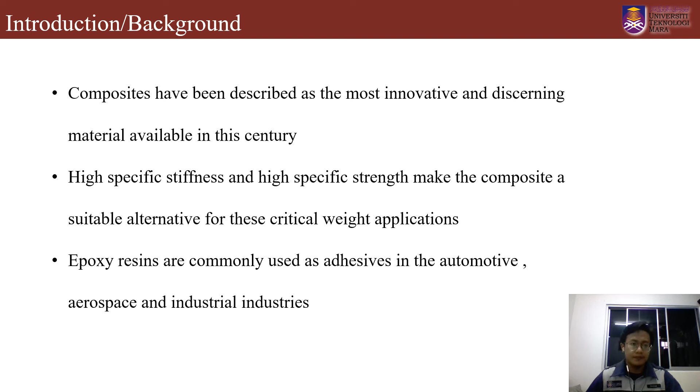There are several problems in doing this experiment. Epoxy composites absorb water, which affects the physical and mechanical properties. It is generally reported that mechanical properties of composite material are influenced by material aging, which is often accompanied by moisture absorption. This can cause delamination and invisible harm. For example, when any object unluckily drops on the composite material, it does not cause visible damage but can change the performance of the composite material.

Composite material is readily exposed to damp environment. The absorption of water in the composite will have an effect on the mechanical properties of the composite and will also reduce the performance of the composite. The composite will be soaked in distilled water for different periods of time and the amount of liquid absorption will be evaluated. The amount of absorption will determine the effect on the performance of the composite.

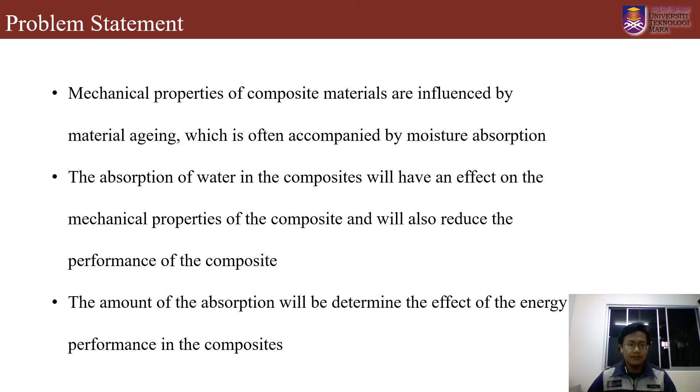There are several objectives in doing this experiment. The first objective is to fabricate composite with moisture content subject to 1 day, 10 days, and 40 days of submersion. The second one is to determine the mechanical properties of glass epoxy composite by using dynamic mechanical analysis (DMA). The third one is to determine the shear strength of glass epoxy composite by using the interlaminar shear strength test. And the final one is to determine the flexural strength of the glass epoxy composite by using the bending test.

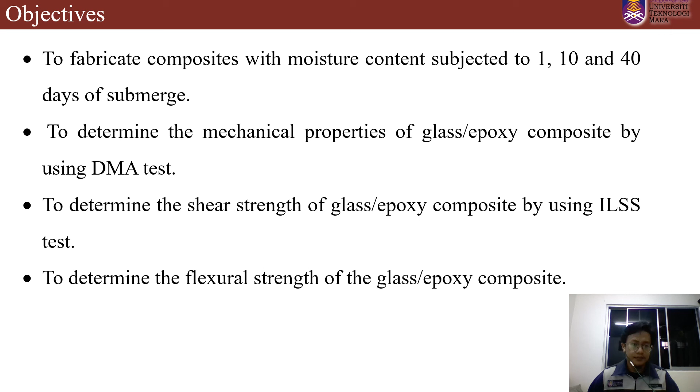For the literature review, we need to find journals about the title that we chose and do some research on it to ensure that we understand the title given. The first one that I found in my research is composite material. The formation of two or more materials with significantly different physical or chemical properties, when combined, produces a material with different characteristics compared to the basic elements.

Composite materials are widely used for bridges, houses, and structures such as ship hulls, race car frames, toilets, storage tanks, marble sinks, and countertops. The greatest disadvantage of composite material for manufacturers of components and aircraft is their higher initial cost compared to metals. The higher cost is mainly due to the quality of the fibers and the complex process needed to produce the finished material. A wonderful material with a lightweight, high strength to weight ratio and stiffness properties has gone a long way to replace traditional materials such as metal, glass, and plastic.

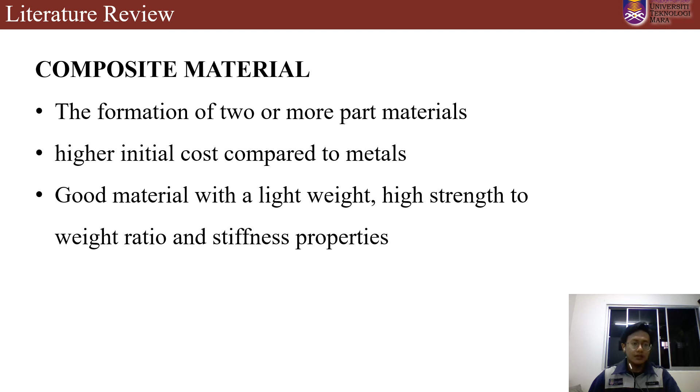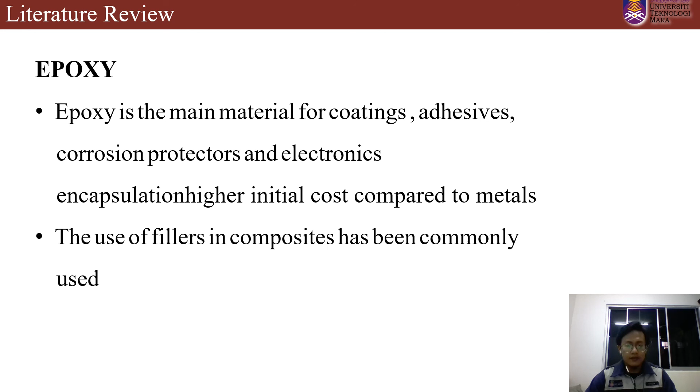The next one is about epoxy. What is epoxy? Epoxy is the main material for coatings, adhesives, corrosion protectors, and electronic encapsulation. Epoxy-based coatings in automotive applications prevent rust and corrosion on vehicle and metal components. Recently, the use of fillers in composites has become common, as certain forms of fillers improve composite properties compared to inorganic fillers such as carbon black and titanium dioxide. Natural fillers have the advantage of lower weight and lower price.

What are we going to do for the composite in this experiment? We need to soak the composite specimen in distilled water. So, in my research, I found the influence of moisture content on composites. Composite materials are always exposed to moist and wet environments during their service life. It is important to study the effect of moisture on composite material. Moisture absorption test is a suitable test to investigate the effect of the moisture on the composite.

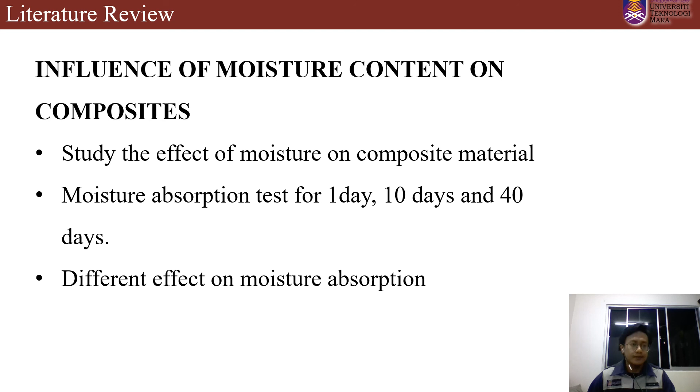In this project, the specimen will be submerged in distilled water at room temperature for 1 day, 10 days, and 40 days. The effect of different moisture content on the composite can characterize the interlaminar fracture toughness as the ratio and moisture content level. The same type of composite will have a different effect on moisture absorption. There are three types of tests that we are going to do in this experiment, which are dynamic mechanical thermal analysis, DMA, interlaminar shear strength, ILSS, and flexural test, which is the bending test.

Dynamic mechanical thermal analysis, better known as DMA, is a technique where a minor deformation is applied to a sample in a cyclic manner. This allows the material's response to stress, temperature, frequency, and other values to be studied.

Storage modulus or dynamic modulus is usually linked to the Young modulus. This is also correlated with the stiffness of a substance and defines how stiff or flimsy a sample is. Loss modulus or dynamic loss modulus is the viscous reaction of a material, and it is considered to be the material's propensity to dissipate the energy applied to it.

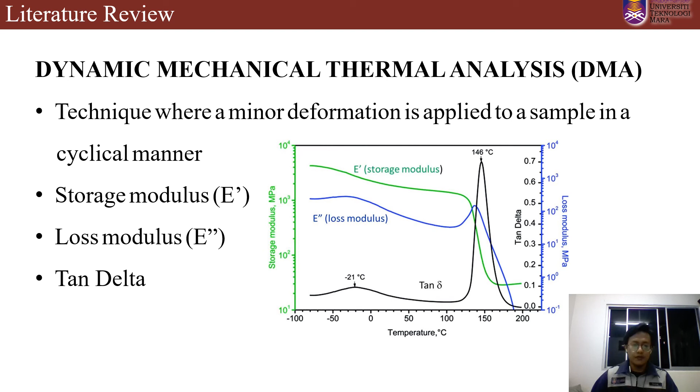Tan delta is expressed as a dimensionless number, and it is considered to be a mechanical damping factor known as the ratio of loss and storage modulus. A high tan delta value indicates a material with a high non-elastic strain component, while a low value indicates higher elasticity. These are the graphs that show the relationship between loss modulus, storage modulus, and tan delta, which is damping factor.

The next test that I will present to you is interlaminar shear strength, which is ILSS. The manufacturing method of composite production restricts the thickness of the fibers in order to maintain the transverse load, which affects the ILSS properties of the composite. Interlaminar shear stress can be caused by a number of factors, one of which is the material properties between the layers. The interlaminar shear stress plays an important role in the failure strength of composite laminate.

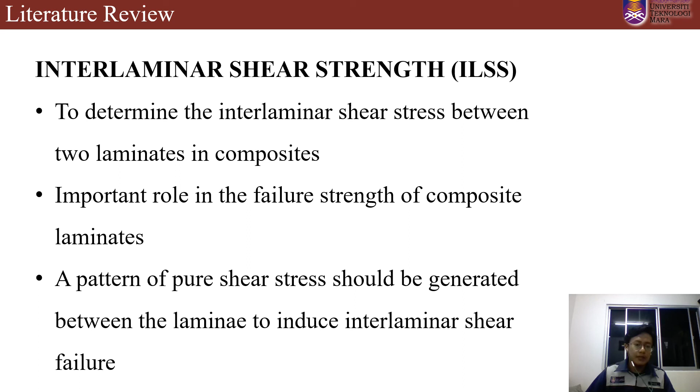The interface can be sheared apart in the corresponding direction. When the transverse shear load experienced by the epoxy composite exceeds the interlaminar shear strength, delamination failure occurs between the layers of the reinforced fiber. In order to measure the ILSS of the composite directly, a pattern of pure shear stress would be generated between the laminate to induce interlaminar shear failure.

For the flexural properties, flexure tests are generally used to determine the flexural modulus or flexural strength of a material. A flexure test is more affordable than a tensile test, and tensile results are slightly different. The material is laid horizontally over two points of contact, and then a force is applied on the top of the material, which is like a bending test. If the failure involves compressive stress, micro-buckling or shear splitting, the failure stress is lower.

The most common aim of the flexure test is to assess flexural strength and flexural modulus. Flexural modulus is determined from the stress-load versus strain-deflection curve. These two values can be used to test the ability of the sample material to withstand flexural or bending forces. And these are examples of the graph of flexural strength, strain, and stress.

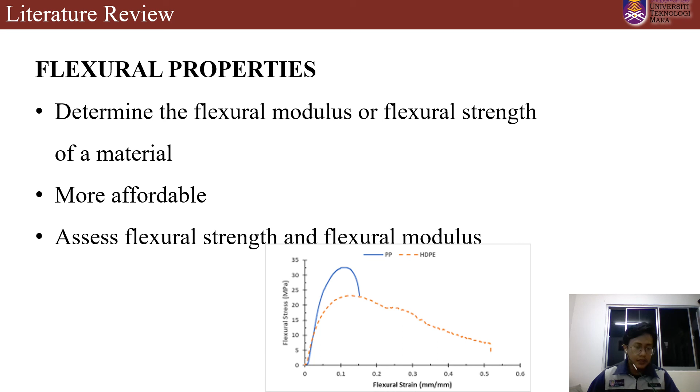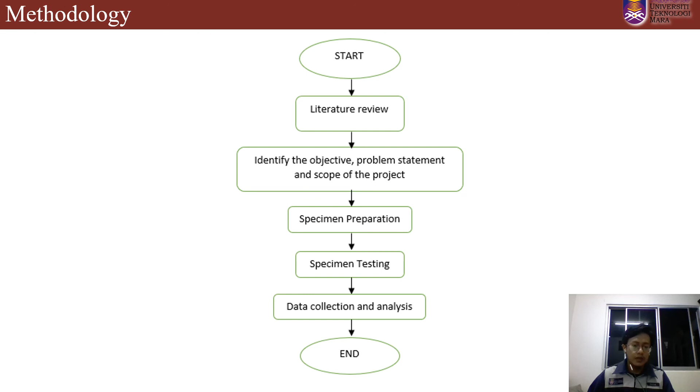By the end of this study, the expected result will serve as the prediction and conclusion for our research. The predicted outcome is that the fiberglass reinforced with epoxy to become an epoxy composite has more strength due to its stiffness, even though the epoxy composite is submerged in distilled water. But the epoxy composite will have lower strength when soaked in water for a long time. The epoxy composite will also have higher strength than raw fiberglass.

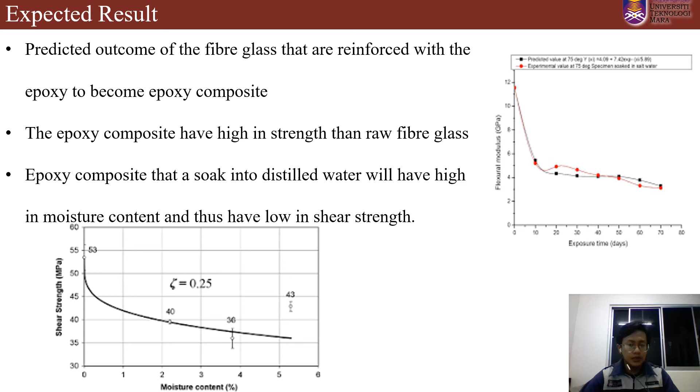The epoxy composite soaked in distilled water will have high moisture content and thus low shear strength. This is an example of the graph: when the specimen is soaked in distilled water for a long time, the shear strength of the specimen will be low.

So that's all from me with the presentation of my proposal in FYP1.